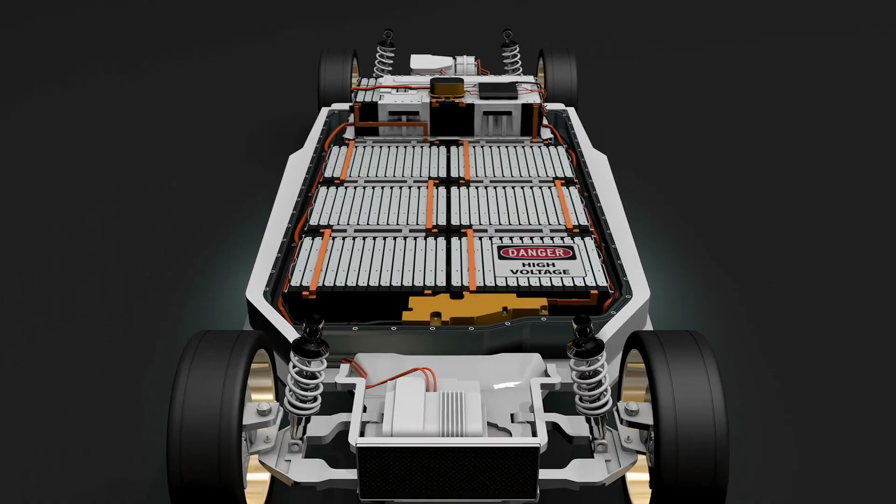So let's start with terawatt-hour scale production. The battery is the core technology of an EV, and Tesla's biggest supply constraint to growth is battery production. During Battery Day, Tesla laid out their plan for scaling battery production, and it starts with the terafactory.

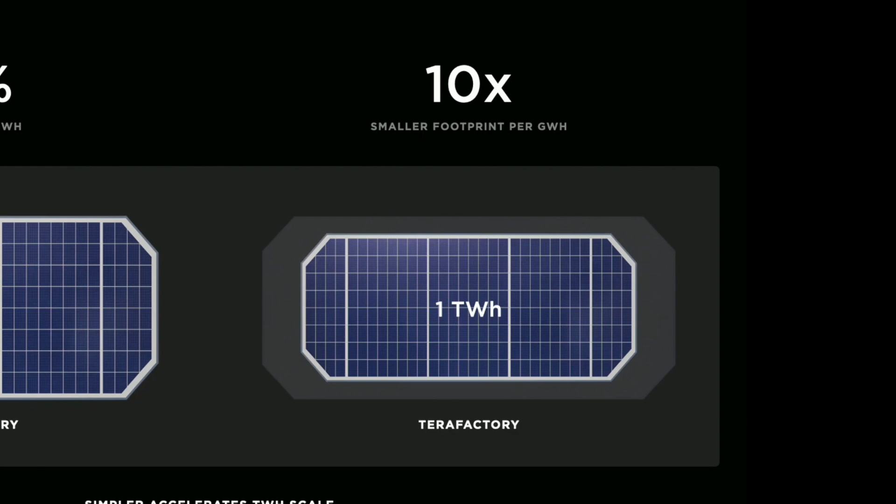Producing batteries at the scale they need will require fewer factories with higher output. Through innovations in manufacturing, Tesla's new terafactories, possibly starting in Austin, will have a 10x reduction in floor space per gigawatt hour and a 75% reduction in investment per gigawatt hour. This means terafactories will have a smaller footprint than a gigafactory, while producing on a scale an order of magnitude greater.

Next, let's talk cell design. Tesla introduced their new tabless 4680 cells, which boast 5 times energy, 6 times the power, and a 16% increase in range with almost no change to charge times. The new design will greatly simplify the manufacturing process, which will further reduce cost and increase production rates.

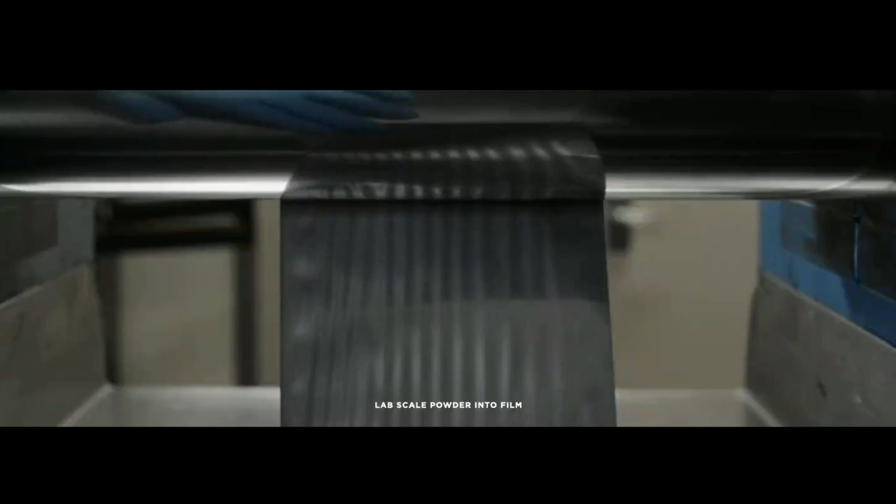They also shared their dry electrode process, which will further reduce factory floor space required by removing massive ovens needed to dry the battery electrode slurry.

Let's move on to cathode and anode improvements. One of the biggest issues with EV batteries that aren't lithium iron phosphate is the cobalt content. In my Tesla mining video, I mentioned that cobalt is a highly problematic element, as it comes from the Democratic Republic of Congo, where the mining process is reported to use child labor. It's also pretty expensive. Tesla's new high nickel cathode will solve these problems, which will reduce costs by 15%.

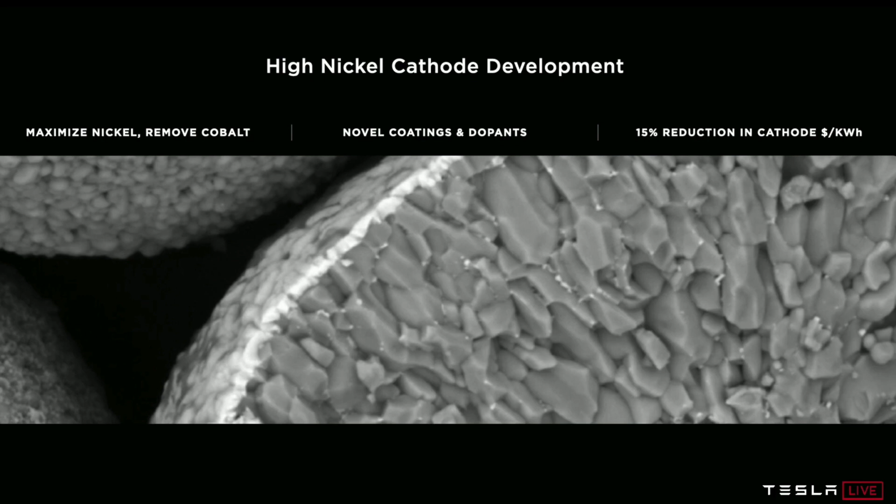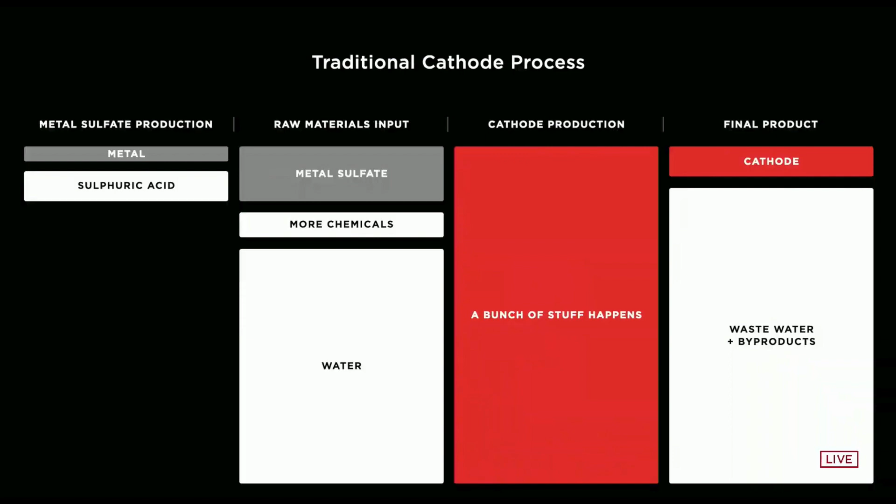They also plan to use raw silicon in their anode to increase range by 20%. Tesla also plans to simplify the cathode process by using raw nickel, which will reduce cost and environmental impact. This is because the use of raw nickel significantly simplifies its processing. It also improves sustainability by making it easier to use recycled nickel, further reducing Tesla's impact to the environment and cost.

Now let's take a look at trifurcation of batteries. To address the battery shortage due to raw material and production constraints, Tesla is essentially going to use every battery that they can get their hands on.

They plan to use the more affordable and longer life lithium iron phosphate batteries for power pack grid storage, Model 3 production, probably in China only, and their more affordable $25,000 vehicle, which they also mentioned during the presentation. Though it doesn't look like we'll see it for another 2 years or so, this chemistry will also be useful in their robotaxi fleet for its high cycle life.

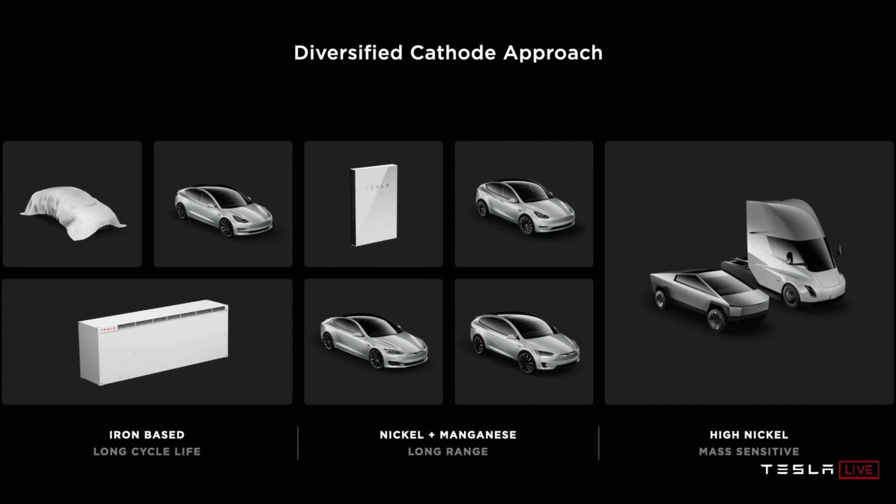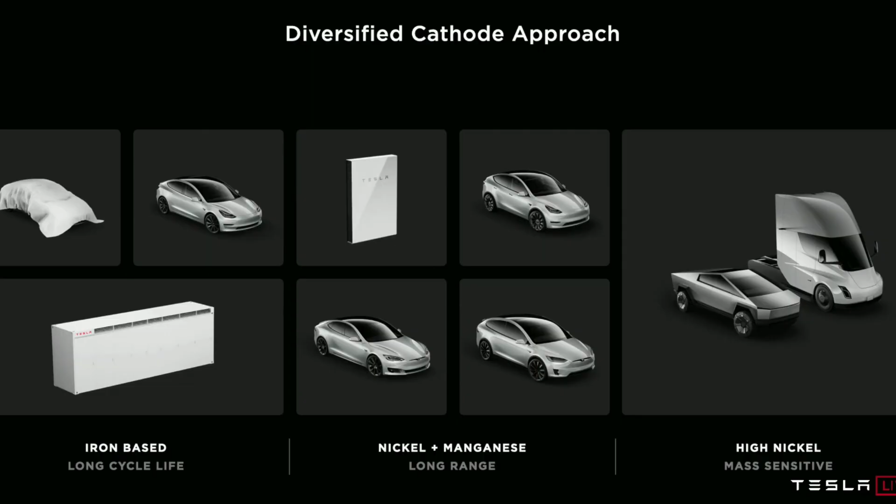They're also coming out with a high nickel chemistry, which will offer the highest energy density and be used on mass-sensitive vehicles like the Semi and Cybertruck. Splitting battery use by application will allow Tesla to improve efficiency and production through diversity of supply chain. Tesla won't have to worry about cell production of the Cybertruck being interrupted by Model Y supply needs, and vice versa.

Next, let's talk Tesla mining. So it turns out I was right about Tesla getting into mining, but I was a little off as far as location and the element that they'll be mining.

Tesla plans to mine lithium through a new extraction process that will use salt to pull lithium from the clay. This new mining operation will be located near their gigafactory in Nevada and will reduce cost as well as the environmental impact from transporting the raw materials.

I mentioned Tesla taking control of their own destiny in a previous video, and it appears that they are indeed serious about this.

By developing mining operations, Tesla will have significantly more control over the most critical element of their supply chain. I'm excited to see how this mining implementation goes and what other elements they will mine in the future.

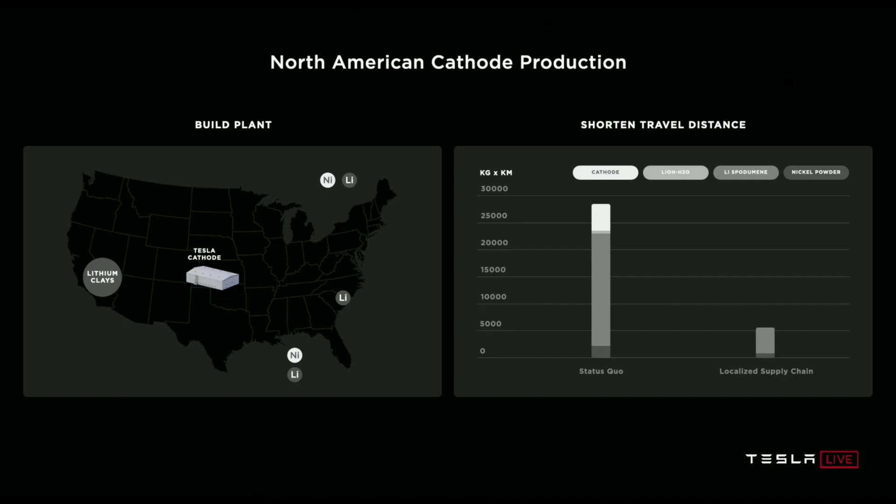Tesla also plans to build a localized cathode plant to lower costs and transportation impacts. This map has me curious though. Did they put the cathode plant in Oklahoma because it's the center of the United States? Or perhaps they put it here because they're still eyeing Tulsa as a potential location.

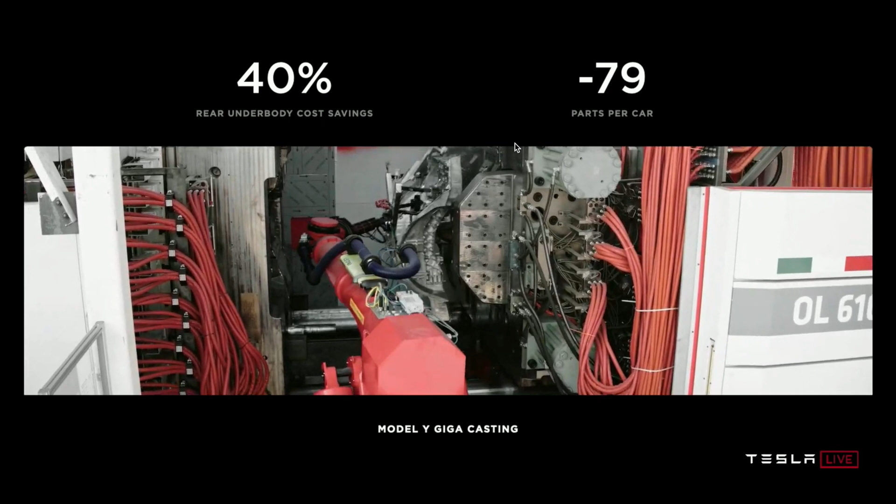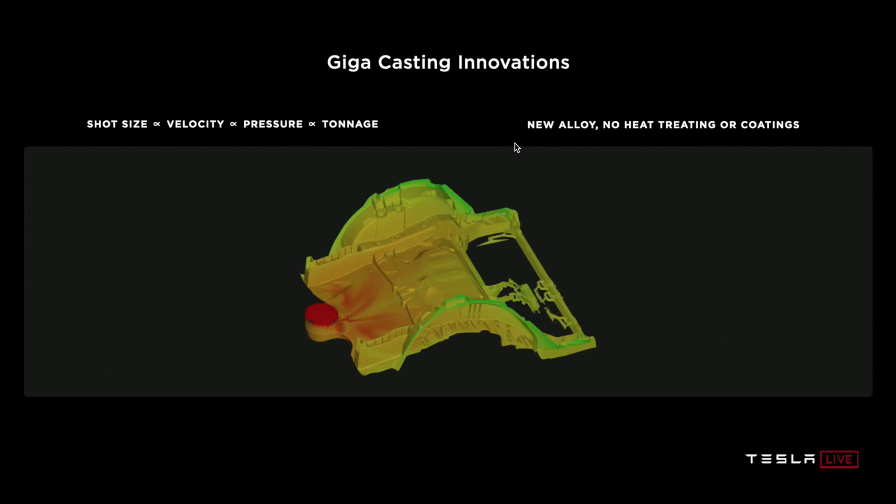Now let's move on to giga casting. Tesla's implementation of giga casting, which will cast the Model Y rear body as a single piece, will significantly reduce the cost and complexity of the vehicle, taking 80 parts to 1 part. To achieve this, Tesla has commissioned the largest casting machine in the world. They've also developed their own alloy to withstand the casting process and harden without heat treating. This speaks to Tesla's advancements in material science, which at this point, other automakers can't hope to match.

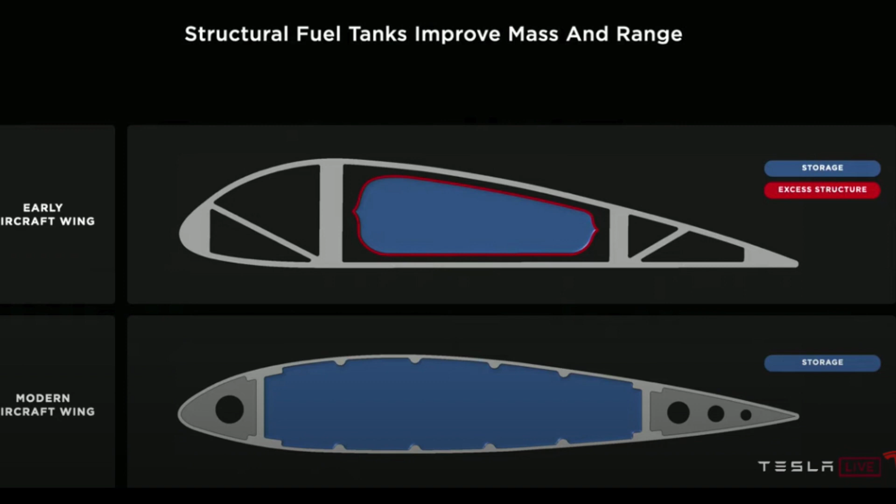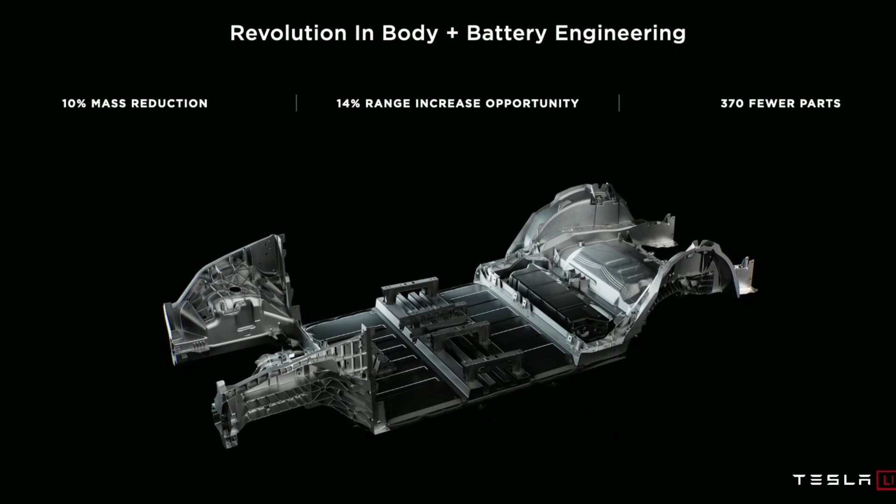Now let's check out the structural battery. Probably one of the most interesting announcements to me was Tesla's plan to integrate batteries into their vehicle structure. Using the evolution of aircraft fuel tanks as an example, Tesla plans to remove all the excess structural elements of the battery pack and incorporate batteries into the structure of the vehicle. This will significantly reduce mass and allow tighter packing of batteries, enabling higher energy density at the pack level. The result of this will be both mass and range improvement, as well as improved structural integrity.

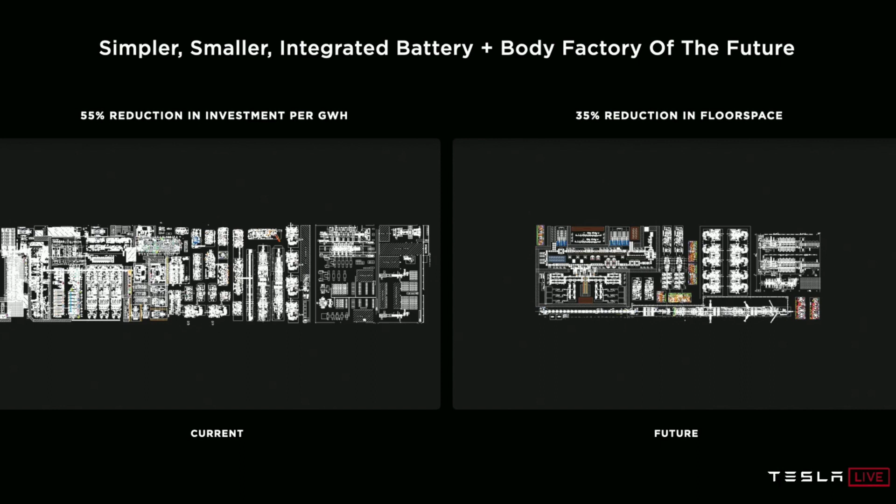This will of course have a positive impact on the factory and production due to fewer parts and further simplified manufacturing. Is it just me, or does the factory look like a computer chip? According to Elon Musk, the best part is no part. The best process, no process. With these reductions in parts and further simplification, Tesla is able to further lower costs and gain efficiency.

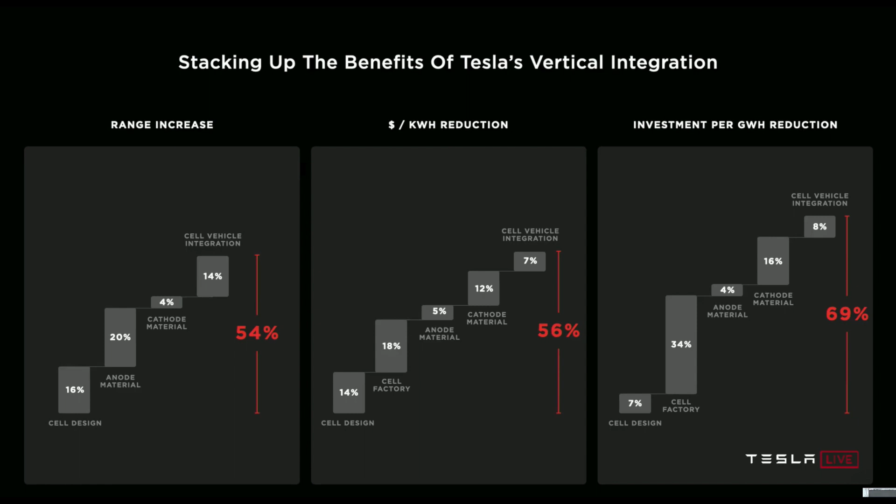Next, vertical integration is Tesla's moat. Tesla's vertical integration is what makes their vehicles superior to other EVs. Battery Day laid out the roadmap to further vertically integrate, from cell design to materials to factory improvements to integration into vehicles. Tesla has reduced costs and manufacturing complexity by taking production further in-house. The techniques discussed will result in a 54% range increase, a 56% cost per kilowatt hour reduction, and a 69% reduction in investment per gigawatt hour. Traditional automakers can't hope to match Tesla's efficiency in manufacturing, and I think Tesla's lead is actually accelerating.

Finally, let's look at the $25,000 model. Tesla didn't say much about their new $25,000 model other than the fact that they're making it. EVs have always been a bit expensive, and to the average consumer, they aren't worth the upfront cost. But Tesla has continually decreased the price of their vehicles by improving the manufacturing process and battery technology. The company acknowledges that in order to achieve their goal, they're going to have to lower their prices further.

And the $25,000 model is another way they can make their vehicles more accessible. Tesla plans to use LFP batteries for their new model, which is already a low-cost option. By the time this vehicle reaches production, Tesla will be able to apply all that they've learned in the vehicle manufacturing space to reach price parity with the Honda Civic or Toyota Camry. This will be critical to accelerating the transition to sustainable energy, as upfront cost is the primary discriminating factor for most drivers.

Overall, Tesla's Battery Day seems to have underwhelmed the broader market, which I attribute to a lack of understanding of the technology explained, as well as a shorter term view on the company. This, however, creates a buying opportunity for long-term investors who understand Tesla's narrative. I'm not surprised by the market's reaction, as Tesla did lay out a plan that covers the next couple of years versus one that covers the next quarter.

Most people were probably expecting a flying car or something, but for those who understand what's really at play here, this is incredibly exciting and points to a highly profitable and prosperous future for the company.